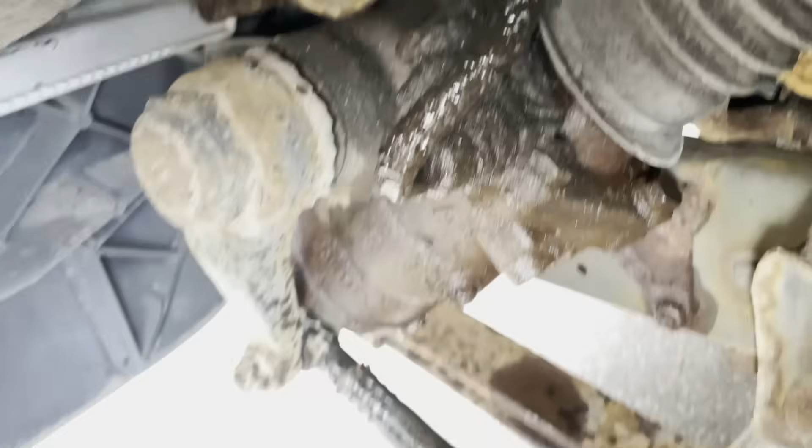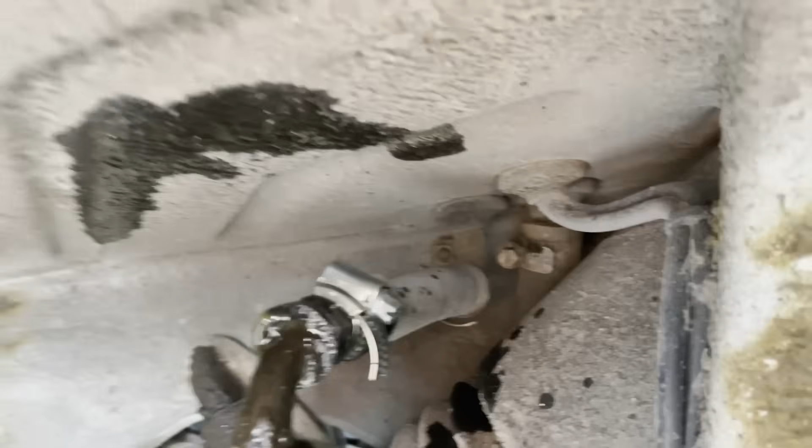Okay, so I bought it 10 minutes ago, and here we are already having issues. It's basically dripping. That's the servo oil coming out there. Great! Yeah, it is what it is. I think we can just change that, and then we'll be good to go. You can see it coming out. Clamps on the hose, and yeah.

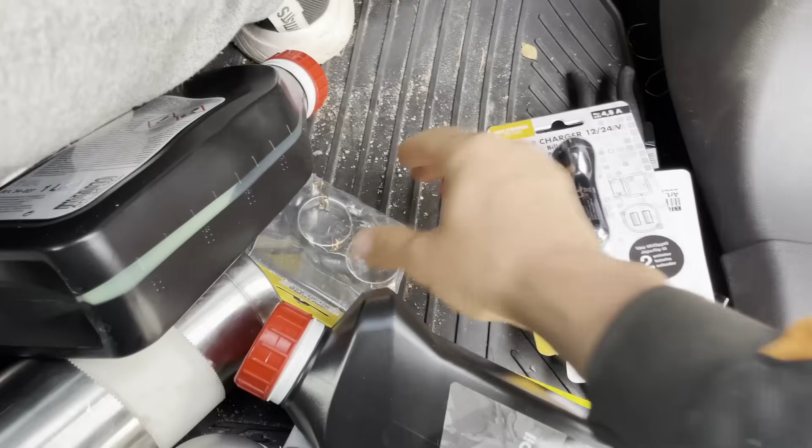Easy. Already used the service car to pick up some new stuff. We got some oils, some clamps, some tools, and yeah, I think Freddy's gonna be the one to fix this. But after that, we got it all home safe and sound, and here we are.

It's wintertime. I'm gonna start doing some adjustments and tear out the interior, and in the summer I'm gonna return back home to my mom and dad's place where I have the van, and I'm gonna do a full rebuild on this. While I'm gone, I'm gonna send it in so they can do a paint job on the lower parts, take all the rust away, and make it super clean, and paint it black on the lower part of the car.

And then I'm gonna adjust a lot of things afterwards, so we're not gonna repaint the whole car just yet, but they're gonna do this in the winter. And then when I return, I'm gonna go pick it up and start doing the rebuild.

So now it's time to start tearing this van apart so we can rebuild it again. This is the old interior. It was registered like this for 6 people, and the previous owners were actually a Swedish rock band. They used this bus to travel around Sweden and have concerts.

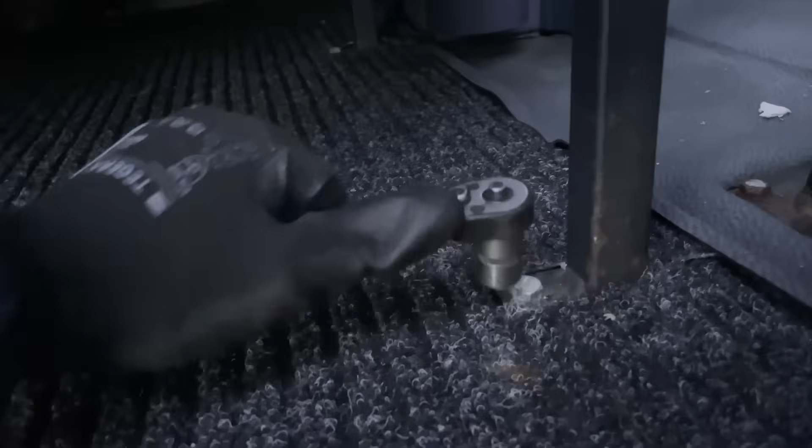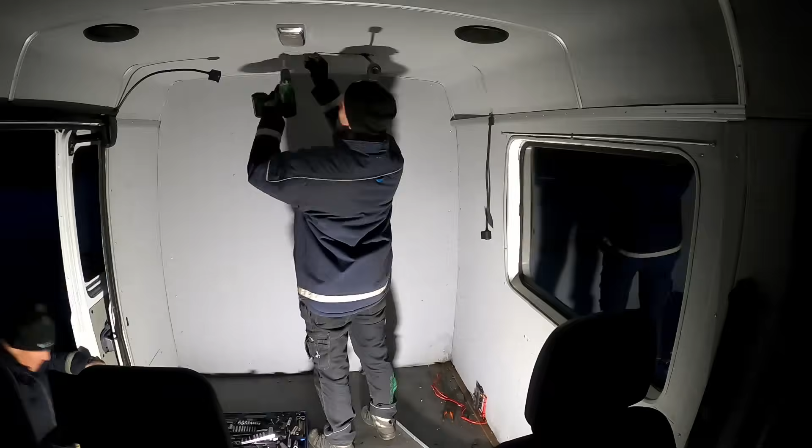This is pretty cool. The build itself was really well done, but even though it was well done, it was still rusted in some parts, so a lot of the bolts we had to cut out with the grinder. Once we got all of the back seats and everything out, we could start going off with the roof and the middle wall.

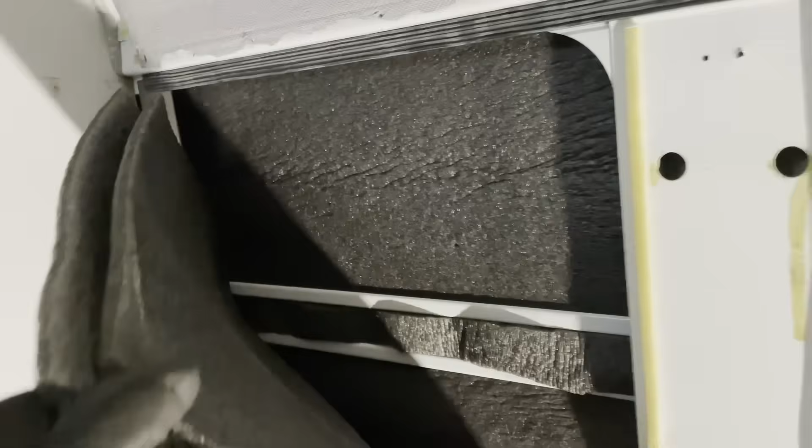I'm super grateful to have my dad come and help me get all of this interior out. You see how they insulated everything, walls, middle wall, everything. Even the roof was insulated with rock wool.

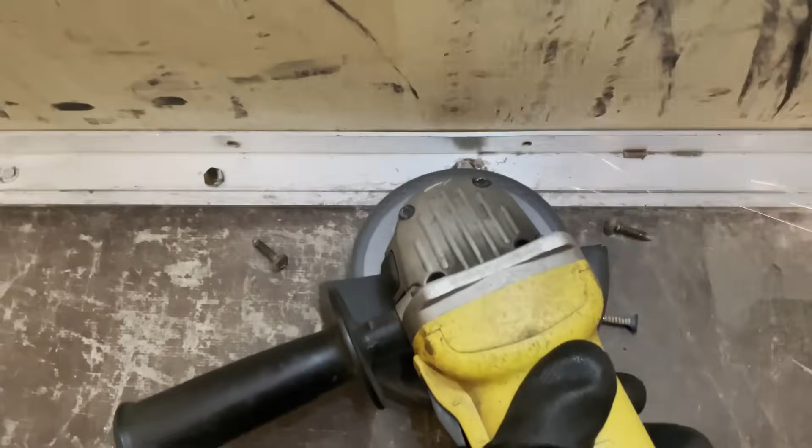After we spent some time inside doing the roof, we went back to the back of the van where they used to have all the instruments and started to tear down the walls. I'm going off with the middle wall, which needed a lot of work to get out. We used a grinder to get all the way around, and after a bit of messing around, we got it out.

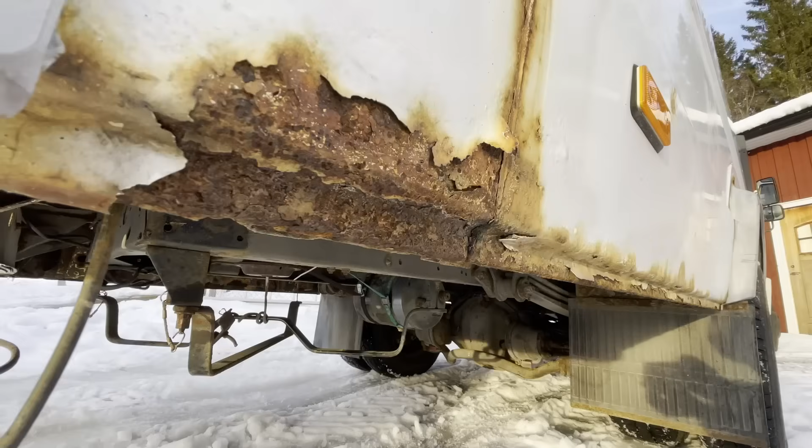So these guys are gonna take care of my van for a couple of months now. They're gonna repaint the lower part, take all the really bad rusty areas away, and I'm so happy that I do not have to do this. So I'm gonna go in and talk to the boys, and in a couple of months I'm gonna pick this car up, and it's gonna be so nice.

Okay, so it's not really summer yet, but I managed to pick up the van because they just called me and it's ready, and I was home.

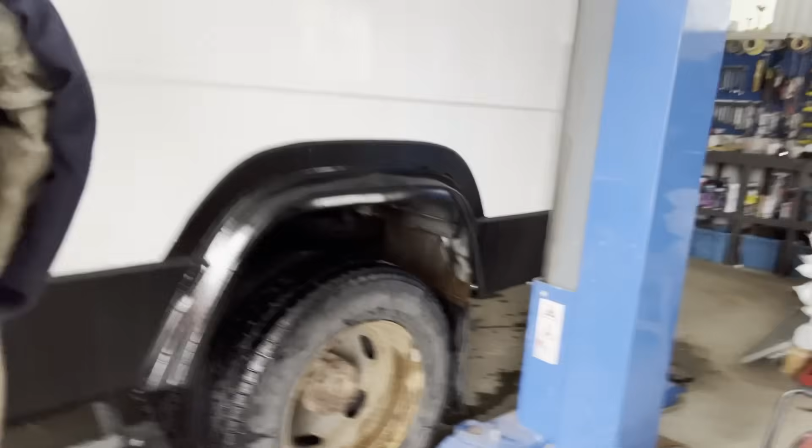So here it is, and my dad just about installed these massive doors so I can finally fit the van inside the garage, so I can do some work inside the garage. But it doesn't really fit everywhere, does it? It's a really tight squeeze to get this inside at all.

But yeah, it's inside. So now I'm gonna start doing some planning of how I want the layout to be inside the van.

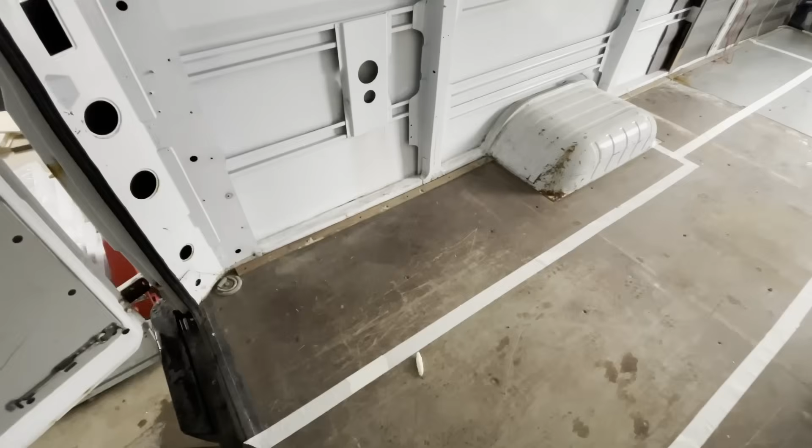Okay, so I've just been measuring up kind of like how I want my layout. So that is gonna be a shower, and that right there is gonna be the kitchen.

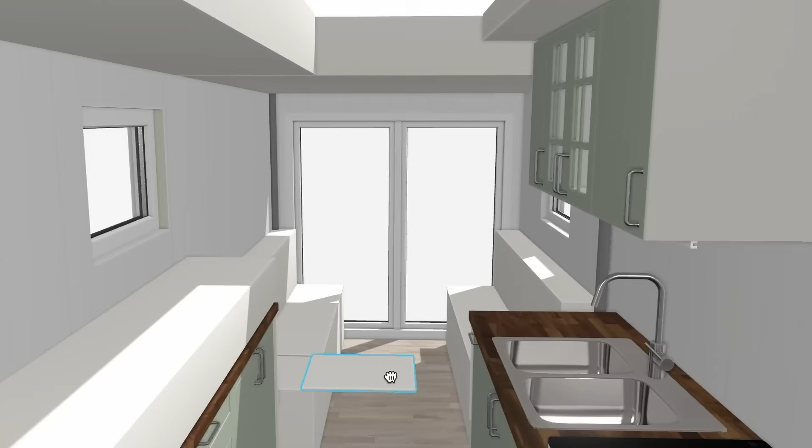On this side, we're gonna have like the studio and the workbench. And here in the back, that's gonna be the sofa, and you can make a little slide over here, so you get like a divan, U-sofa right here. And then from the roof, you're gonna have the bed coming down over the whole sofa.

And those doors are gonna go, and that is just gonna be a complete massive glass window, which is gonna be awesome. Or window, but doors, that's just gonna be super awesome.

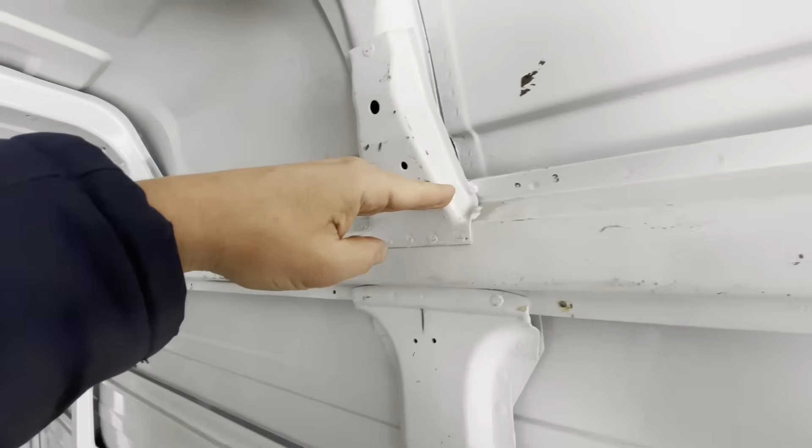And the roof. So the roof is actually gonna be 3 decimeters higher than it is today. So I'm gonna cut everything from here all the way around, and I'm gonna lift the whole roof up 30 centimeters.

And then I don't know how I'm gonna do that here, but I'm gonna sort that out, because that's basically gonna stay kind of as it is. But yeah, this is gonna be a massive project.

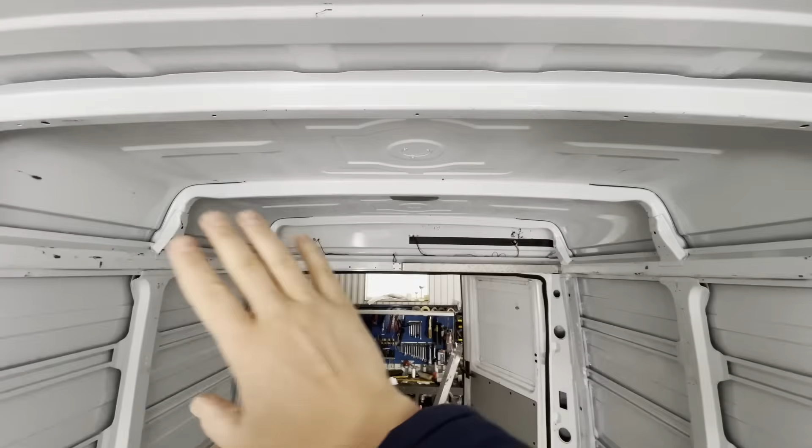The reason for it is that I wanna do a big bed here in the back, and that's gonna slide up to the roof, and I wanna be able to walk underneath the bed when it's all the way up into the roof. So that's the reason why I'm raising the whole roof 30 centimeters.

And here in the front, it's just gonna look awesome with massive space in the roof.

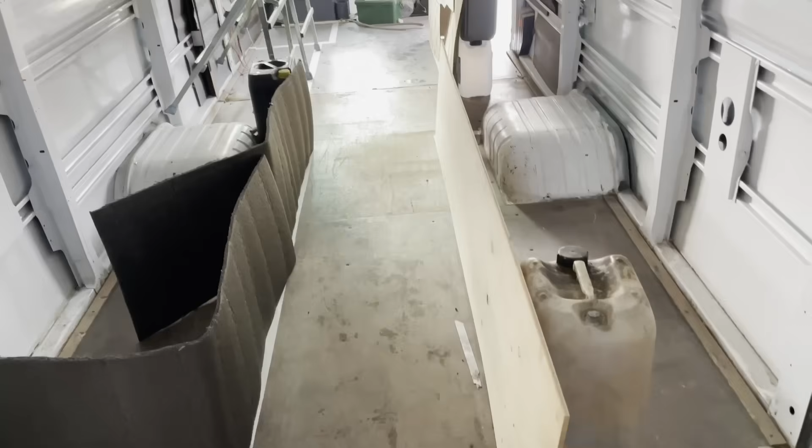So I kind of done a dummy of how this actually gonna look like, so you can get more of a feeling of how it's gonna be with the distance when you walk through, if it's gonna be tight, if it's gonna be too much space, which it never really is in a van anyway.

But yeah, you get the idea, and now it's easier to see if I've been thinking weird somewhere. But it looks nice. Like that's the kitchen right there, the studio bar kind of thing, sofa.

Yeah, it looks awesome. So now when I kind of done the layout how I want it, like I want the sofa here and I want the sofa in here, then I realized that underneath here is a lot of space that is not used.

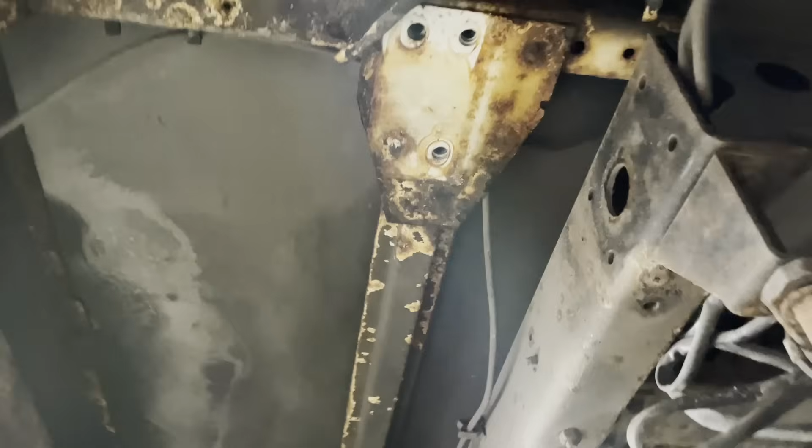You can see like that. So all of this space, I'm gonna cut out this part of the floor and then lower it down and make like a massive box underneath here. And I think that is just gonna be epic, because that gives me a lot of extra space.

So yeah, that's what I'm gonna do now. Cut these out.

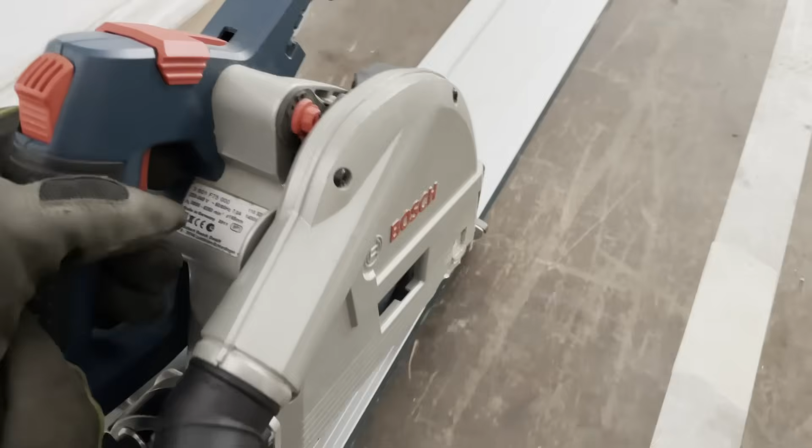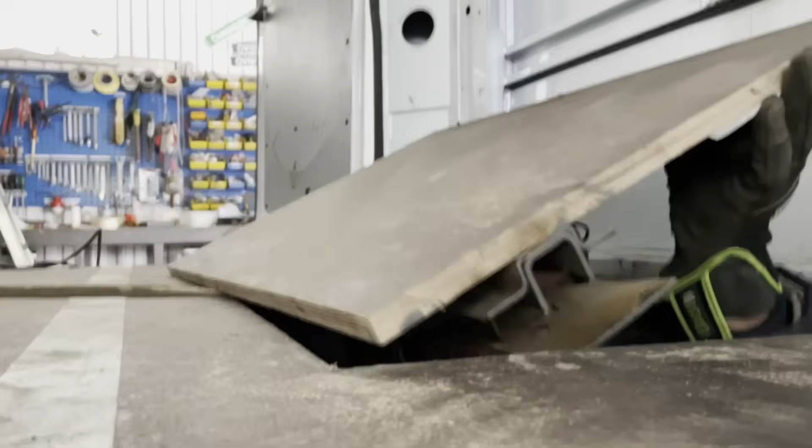I just love using this saw. You put this rail down and then you have a perfect straight cut straight away. Just beautiful. And with a little bit of grinding, with a little bit of sawing, we had our first hole. Hello, Andy.

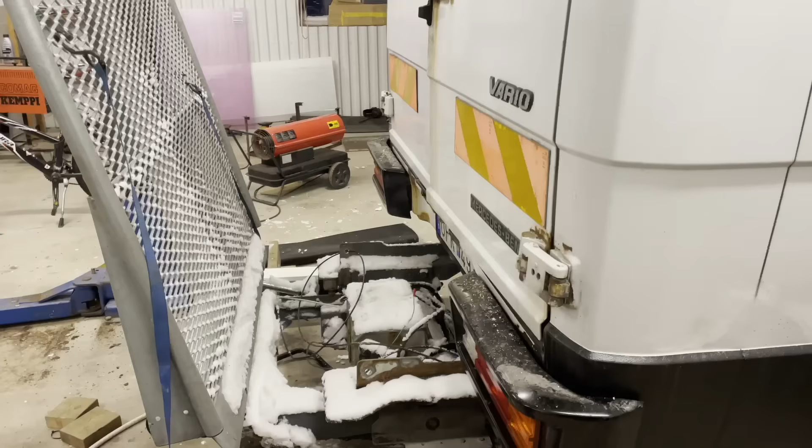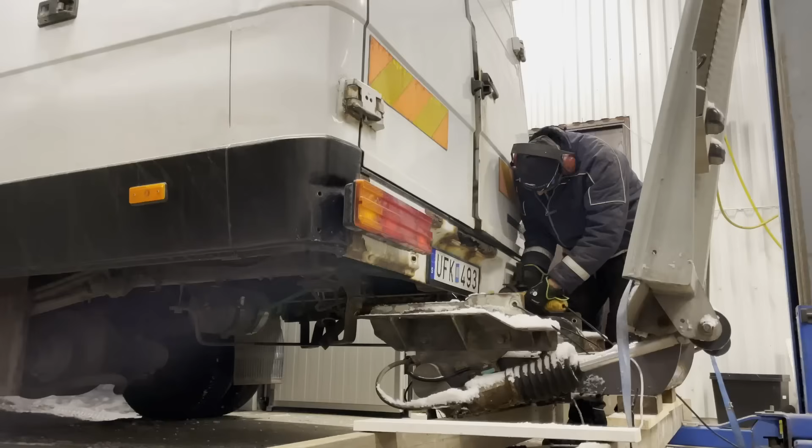Then we're gonna leave the interior for a bit. I purchased this back lift, it's for handicapped, so it's rated for 500 kilos. And now I just need to figure out a way to get this into the frame rail of the Vario.

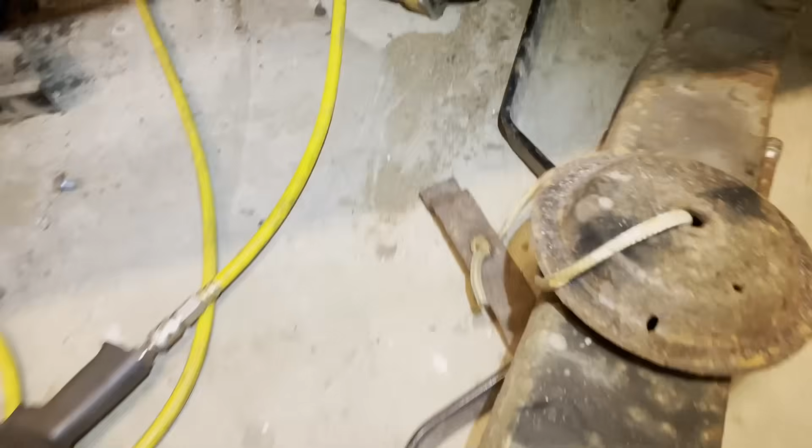So I start up with cutting a big hole in the back. Oh, that's my camera lens, by the way, really getting pounded - I could definitely see that on the camera lens afterwards. We had some extra beams and stuff for the spare wheel that I took out, and then I can start to fit in the lift.

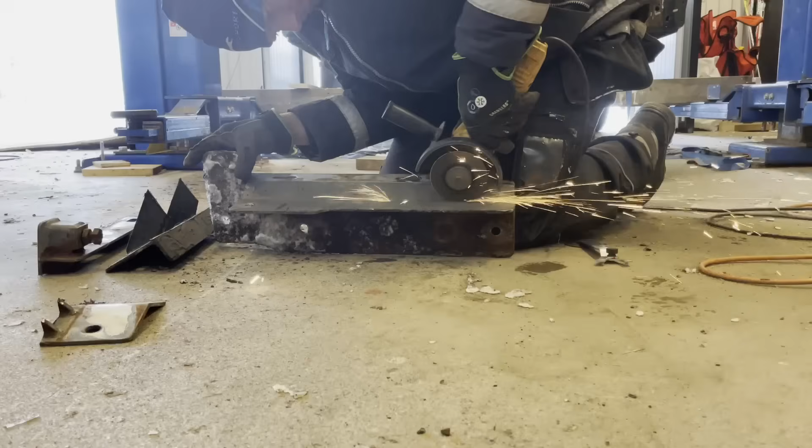The support for the lift was made for a completely different car, so I had to figure out a way of getting this to fit into the Vario. And this steel is really thick, so it takes a while to get through it with the grinder, but I had an idea and I just went for it.

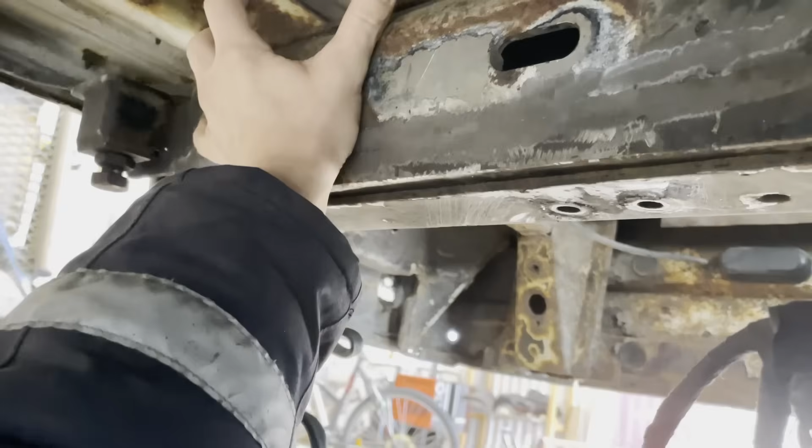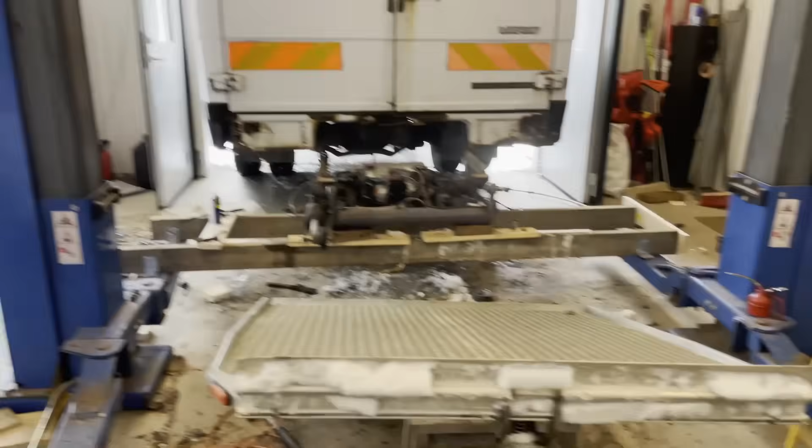So here you have the frame, and my idea is to slide the whole thing into it, just like that. I think that's gonna work pretty well. Well, it may not look like it, but we are really close to getting that one in underneath the van.

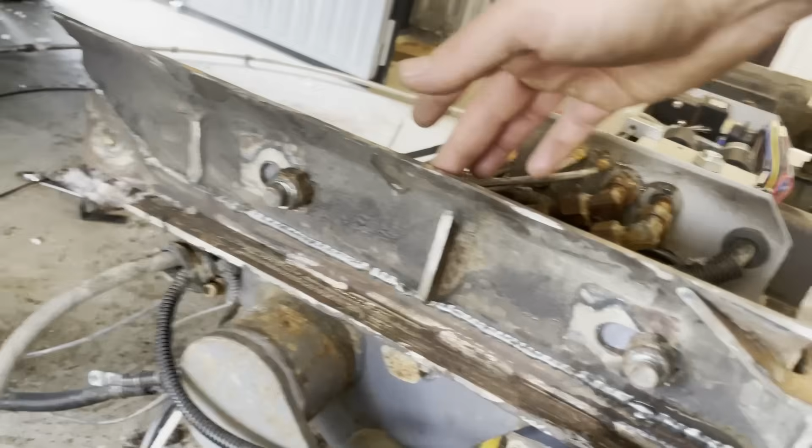Okay, so I had to do a little bit more demounting before I could actually get this in. My garage looks like trash right now, but yeah, that's what it is. I built these ones out of old parts, like the old setup for a Mercedes Sprinter, I think it was.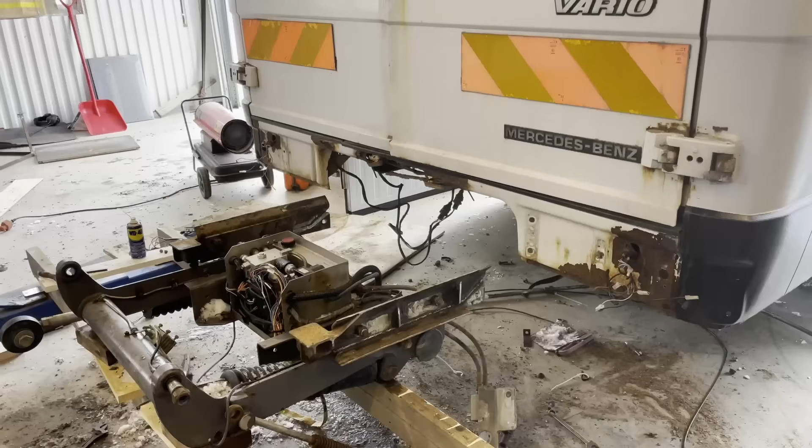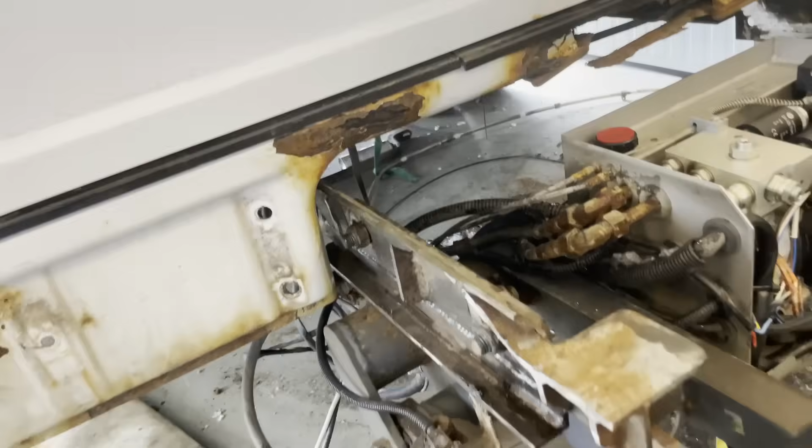Okay, let's see if this fits. It's really hard to do this on your own, but I'm really happy that I have the lift in the garage. Reversing the van and trying to make this 200 kilo unit fit in at the same time was really tricky, but after a little bit of adjusting, I managed to get it to slide into the beams pretty easily.

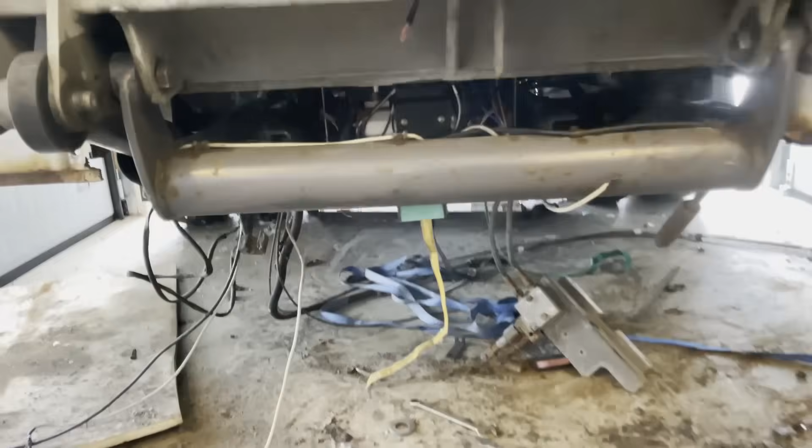And finally, it's hanging by its own power. And I got some wiring to do. That's gonna be a sweet balcony, that's for sure.

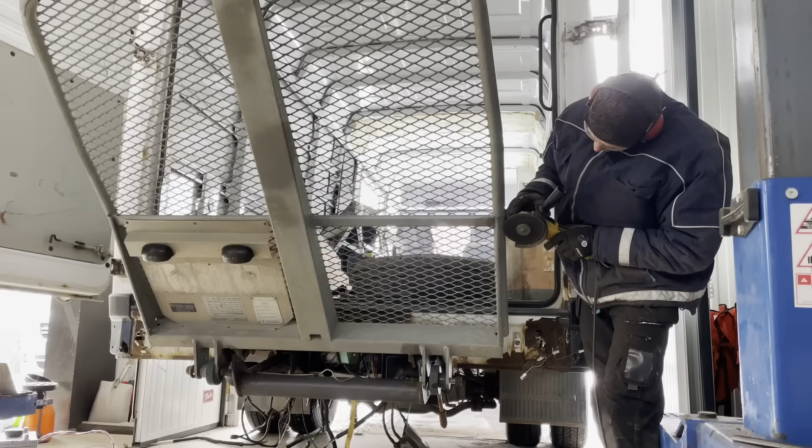So this unit is built up with everything - it has the hydraulic pump, the electrical system, everything, and the remote. So all I needed to do is plug it into 12 volt, and voila, it works. So this is the first time I'm trying it out, and there was no problem. It can sustain the weight and everything was fine.

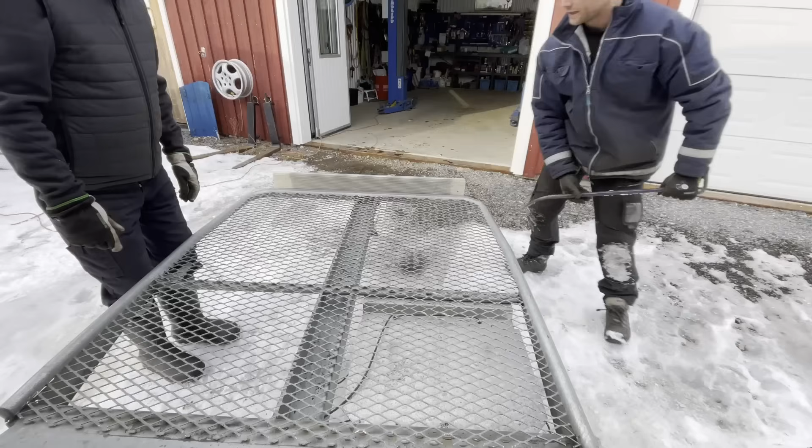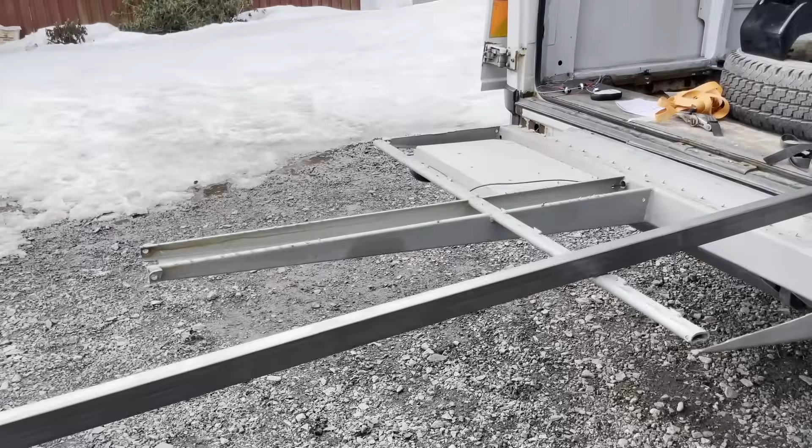Okay, so I've been measuring a lot. I've been trying to put the bike on the back of the van already, and it wasn't quite lifting it up, but we were hanging it up here at the top. So what I think I need to do is actually start lifting the whole bike from the middle of the lift. So I've been buying a lot of these.

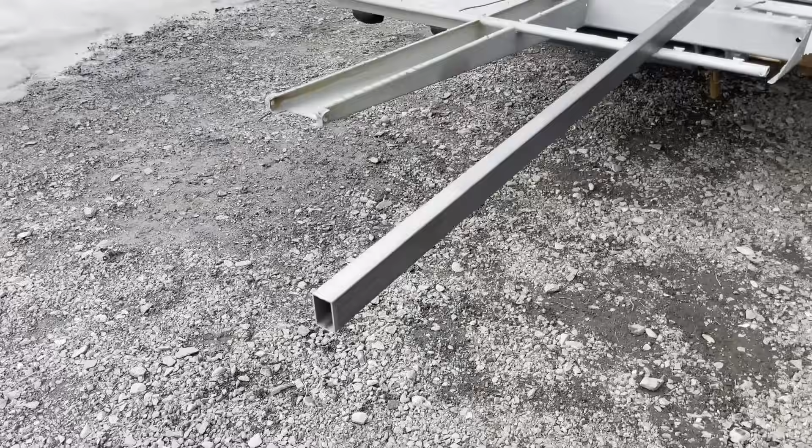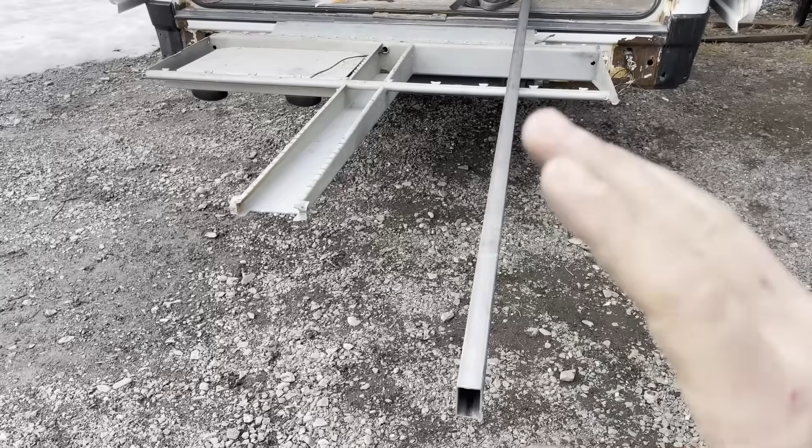I'm gonna do a frame around for the balcony section, and then I'm gonna build an L-shaped frame for the motorbike to stand on. So right now I'm gonna focus on cutting and welding and try to get this into place.

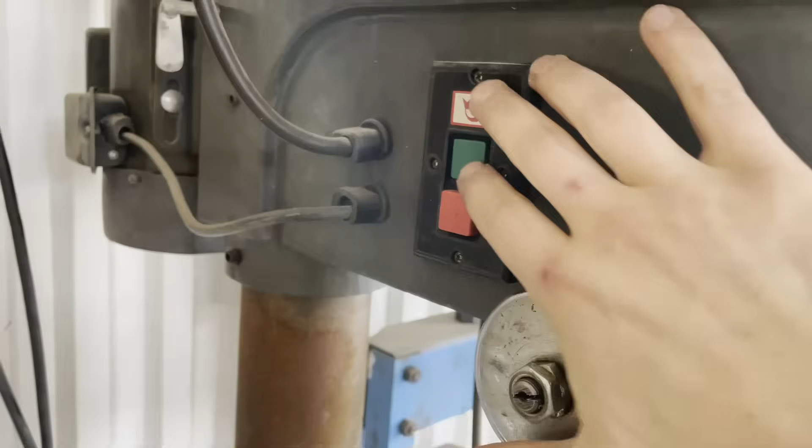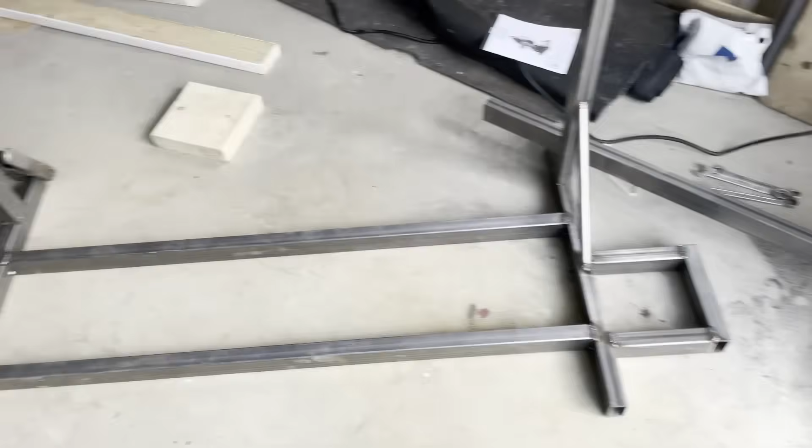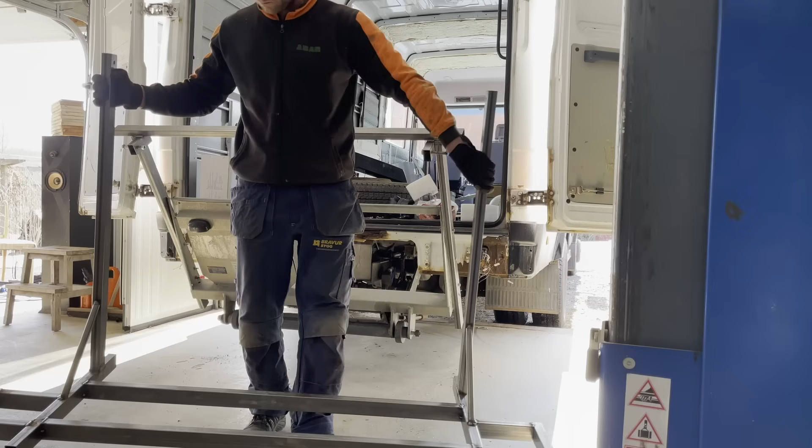So after a couple of hours of welding, I think we are getting somewhere. So it's gonna be a wheel, and I did some extra stabilization here for the frame itself. And then it's time to try to get the bike up for the first time.

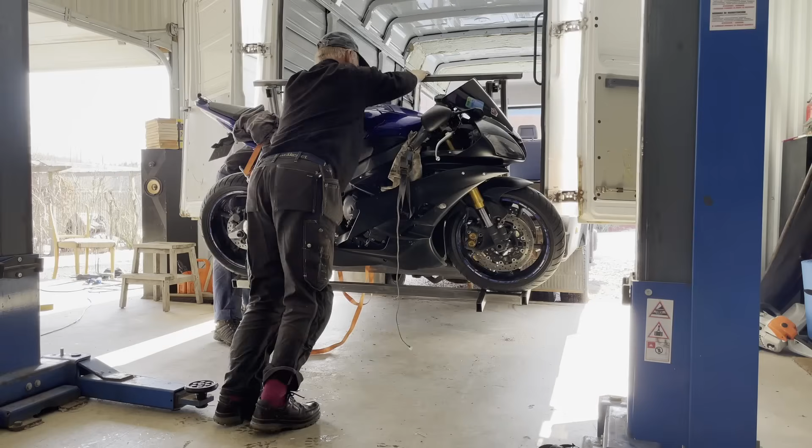This is a really big moment. It's actually hanging in there by itself, but we have a little bit of issues with the construction of this and how much the lift can actually lift. So it's not really lifting the motorbike as it should do. We have to think about something there. But otherwise, it's awesome, it works. I have a balcony and a stand for my motorbike, all in the same thing, which is pretty awesome.

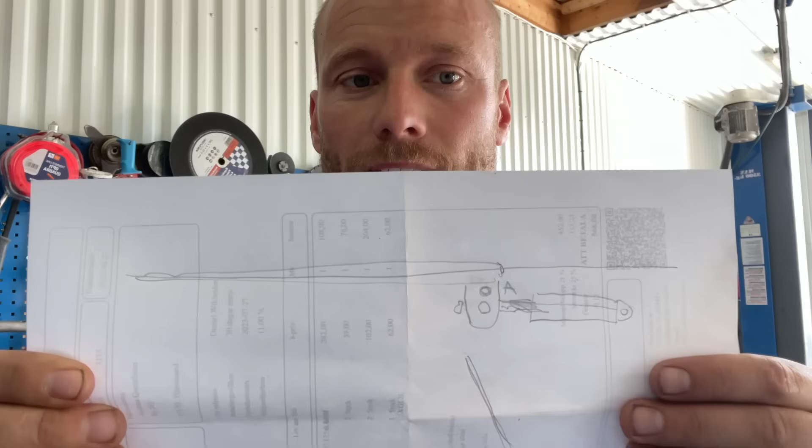Okay, so I'm just gonna explain to you really quick what's going on with the lift, why it doesn't lift the motorbike properly. The lift is 500 kilos, it can lift 500 kilos, no problem, but only when it's all out like that. The cylinder has the most power pushing this way. But when the lift is higher up like this, it has a really hard time pushing the bike up because it's getting really weak with that kind of lift angle.

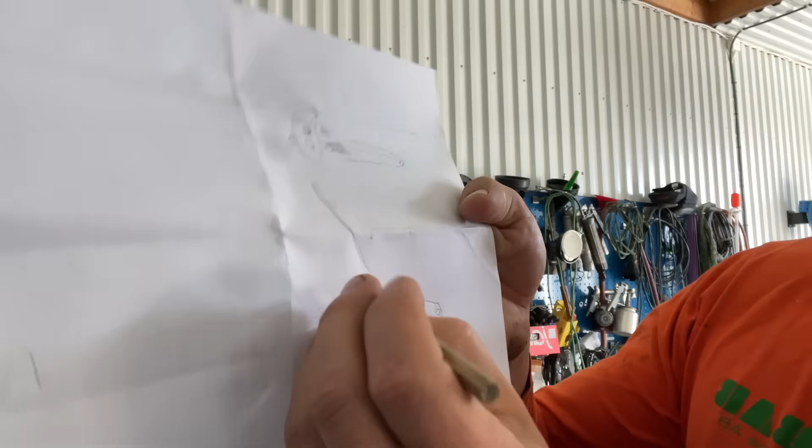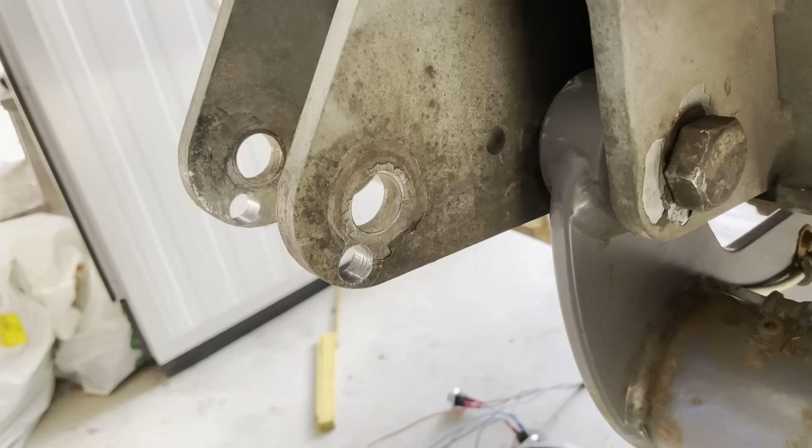So what I've done is created a hole further down like that, so the cylinder has more power when it's lifting in that kind of high angle. I have to do some steel work to make the bolt go further down on the adapter because I don't have enough material on the piece to make the bolt go through. So that's what's gonna happen before the lift is done.

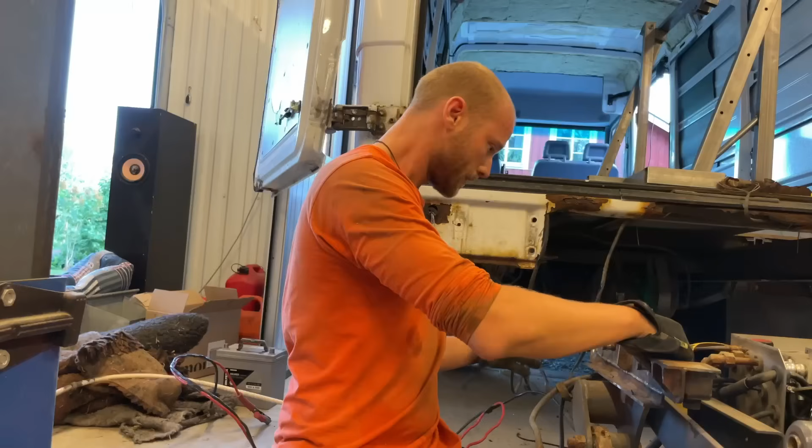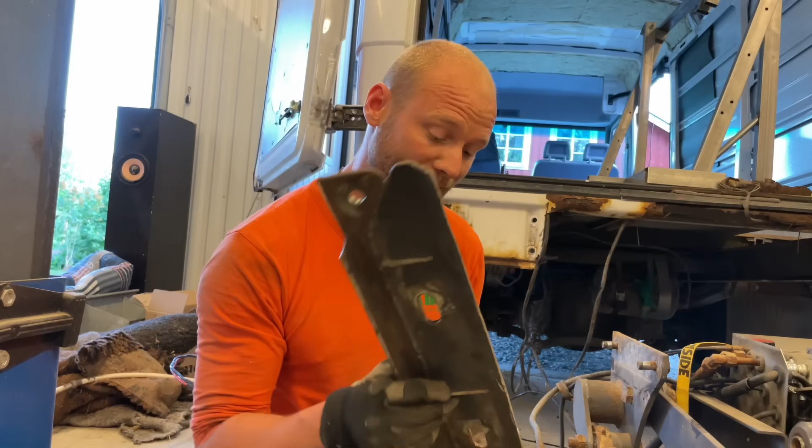So now these ones are gonna get drilled into the frame, and then before everything goes back on the van again, I'm gonna repaint all of this and repaint all of the frame underneath. So that's gonna be the next step.

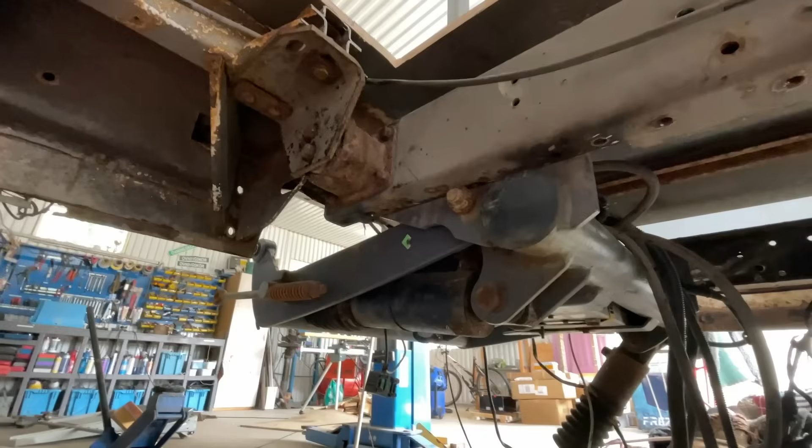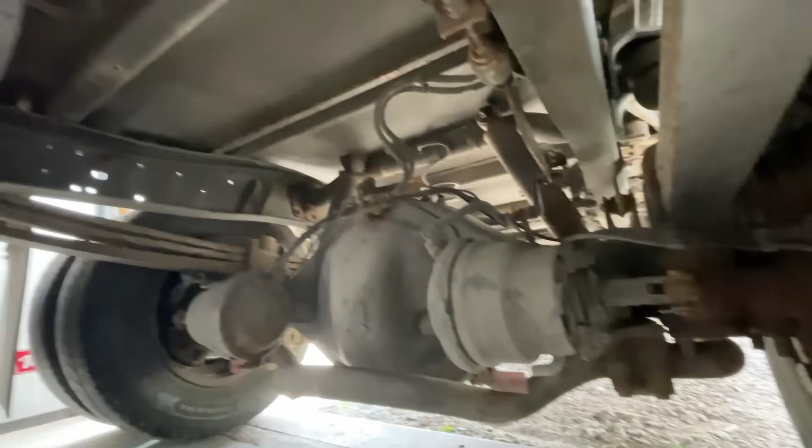Okay, so finished drilling all the holes for that. Now this one is the air tank, the original air tank, that normally sits over there somewhere, but because of the lift, I can't have it there. So this one is gonna go up there, and this area right here is where I'm gonna put my LPG tank. So that's what's gonna be drilled in now before we go on and do all the painting of the frames and get all of this away.

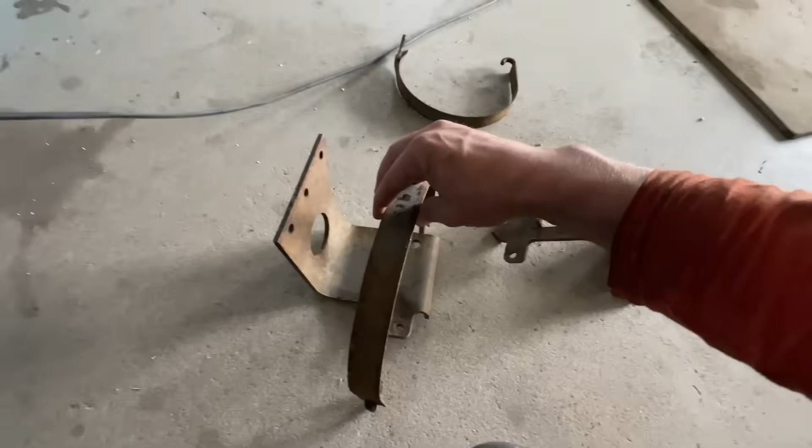So this is the original holders for the air tank. I'm just gonna cut these into pieces and use the part that this one goes into, kind of. And then I'm gonna mount these ones for the LPG tank that is just right there.

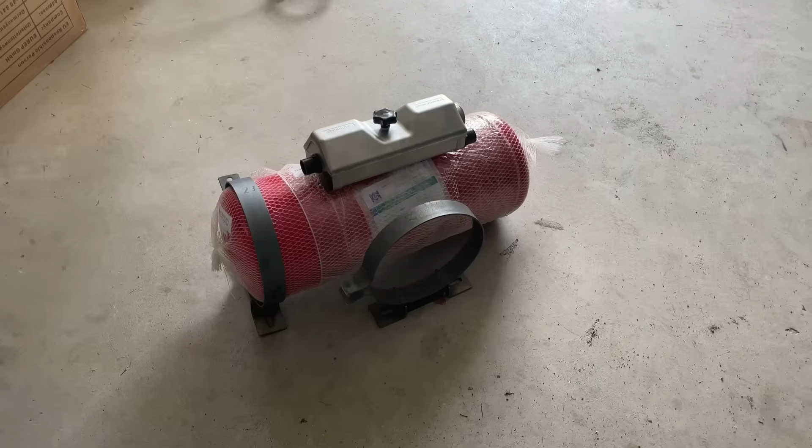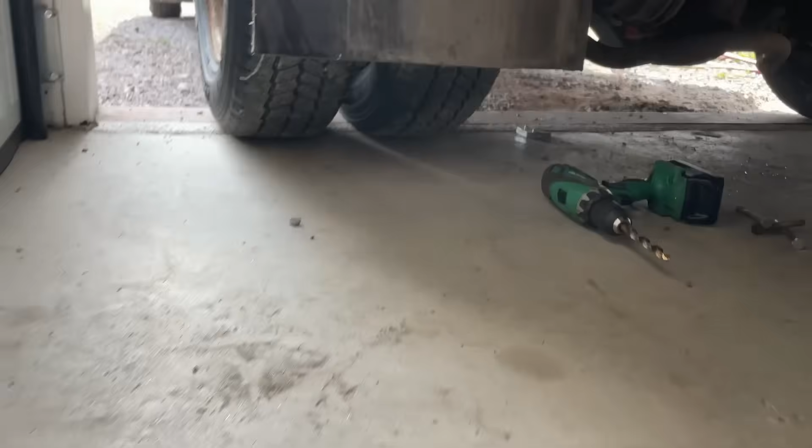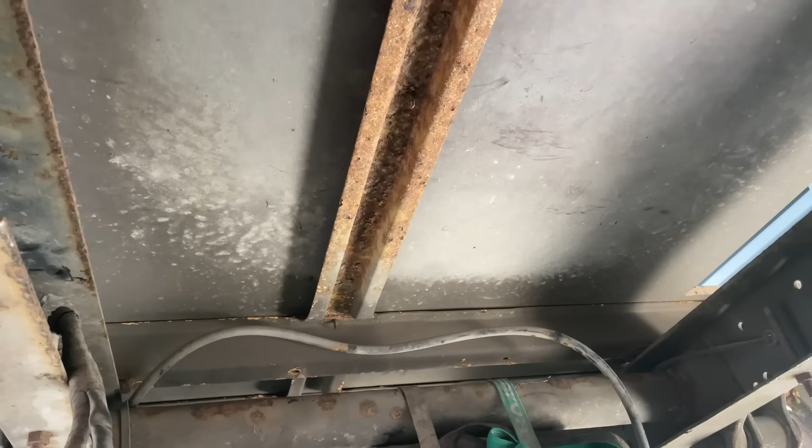Okay, so now it's time for these ones to get inside the van, and the installation is super simple because I've got this area right here, just behind that, and that's gonna fit super perfect right there, I think. I hope.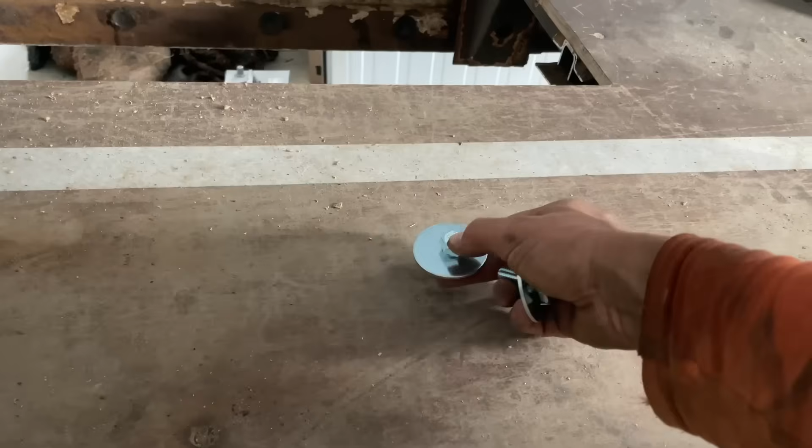And then it was time to drill some holes. When you have a wooden floor, it's super convenient to just measure everything from inside, drill the holes, and voila, we have mounting spots for the gas tank. Once I know everything fits, I painted all of these racks because they came unpainted, and then it was just time to set everything up.

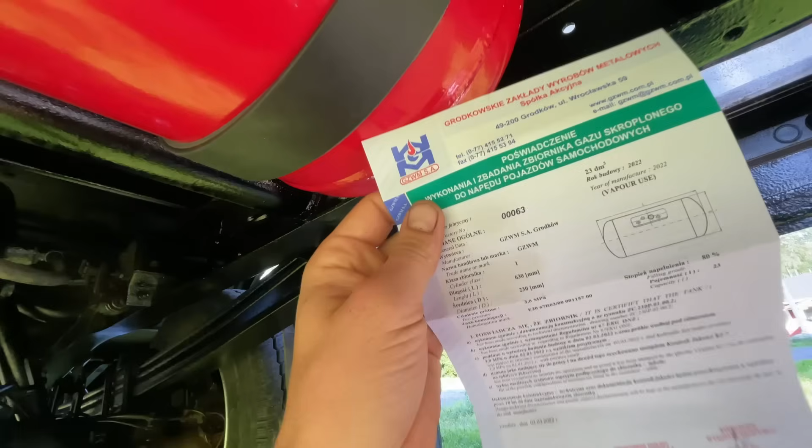And this is hard work when you're on your own. It's a heavy tank, but after a while it was in place, and it was time to go through all the components that I've got with the tank.

So I'm just running through all the things that I've got with this kit. This is to actually have electric measurement of the gas inside the van, and I also have an electric shut off, I think it's on this bottom as well. Yeah, so it's electric shut off, and it's also the measurement for how much gas is in the tank. I got a refilling kit that's gonna be fitted on the van, and then I got the pressure gauge to make it low pressure, and then some hoses and stuff. So I think it's time to get these things installed.